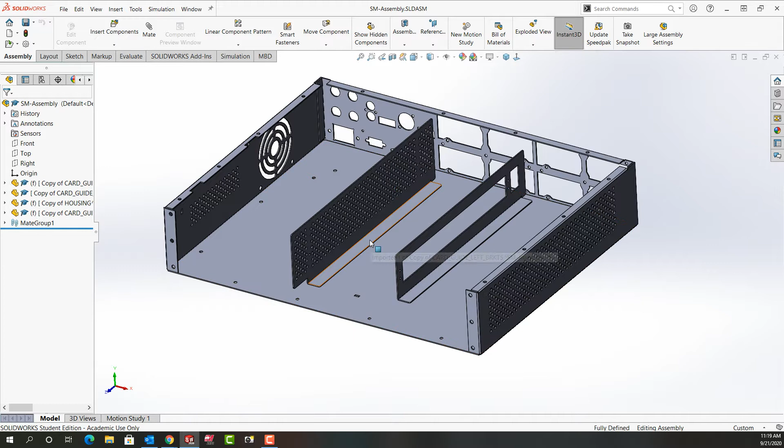In this video, I want to demonstrate how to use the hole series to add a hole so a fastener could be used to fasten this to this. Before I select the hole series, I'm going to pre-select the face where I want the first hole to be. So the clearance hole will be here and the threaded hole will be here.

So I'll pre-select this face and I'm going to look normal to it. By pre-selecting the face, it avoids me starting the hole series and having to create a 3D sketch. Not that it can't be done with a 3D sketch, but if you're not careful, you can accidentally put the hole on an angle. By pre-selecting the face, the hole will start normal to that face.

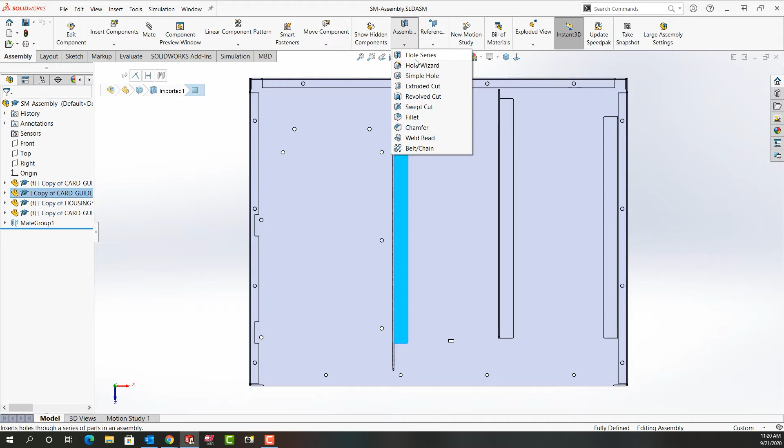So now I've pre-selected and I've looked normal to, I'm going to come up to the assembly features, to the drop-down menu, and I'm going to select hole series. Not hole wizard, but hole series. And the first thing it'll do is it'll say, do you want to create new holes or use existing? I'm going to create new. So I'm going to add 3 points and I'm going to push escape. And I'm going to select them all. And I'll make the relationship vertical.

I'll use mouse gestures to activate smart dimension, and I'll dimension from this edge of this part over. Don't worry that my dimension is not where it should be. With my cheaper graphics card, this often happens. That's okay. I'm going to click to place the dimension. I'll put my size of 0.325 and enter, and it'll go to where it should be. This might happen several times.

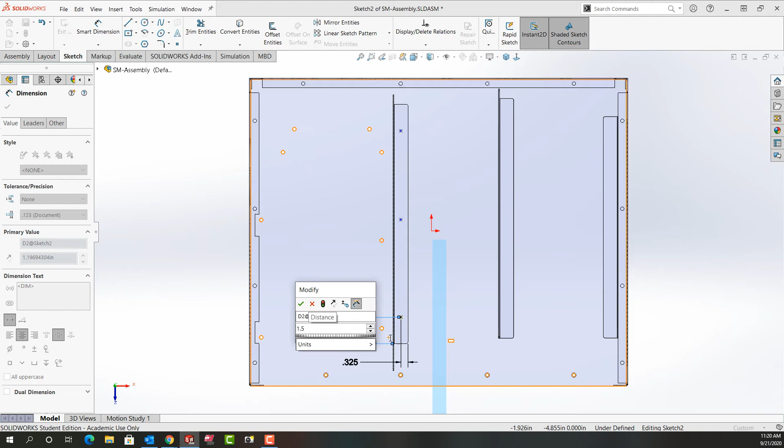So now I'm going to dimension from here up. Again, not worried about where the dimension is. I'm going to make that 1.5. And then I'm going to do the center to center for the remaining 2 holes at 4. And you can see now it's dimensioning in the correct place. So I have my sketch fully defined. I'm going to tell it I'm done dimensioning. I'm going to rotate around a bit so we can see it better. And you'll notice there is a preview already of the hole.

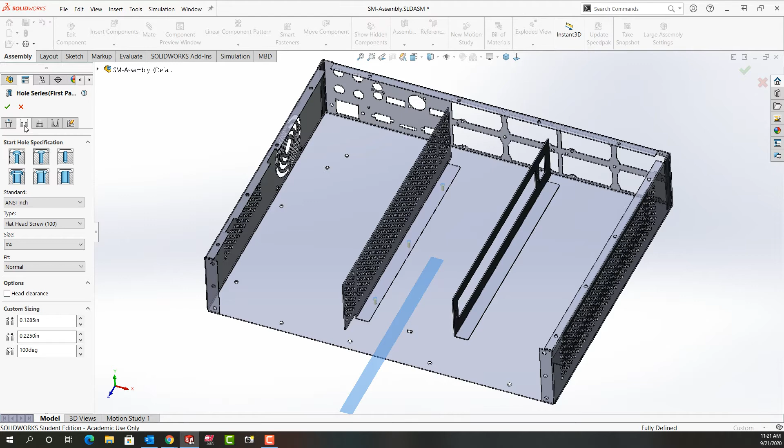So the first thing to do in the hole series is to fully define your positions. And then I'll go to this tab. And what it's asking me here is, in this first part, what type of hole do I want? So I'm going to tell it I want a countersunk hole. And if I zoom in, we can see the preview of a countersunk hole. You can see I'm working with the inch standard. I want a 100-degree included angle flathead screw, number 4, and I'll leave all the standard sizes.

Then I go to the next tab. This tab is if there's more than 2 components. What do I want the hole between the first and the last component to be? I can do a clearance hole or I can do a slot. Now we only have 2 components, so I don't have to worry about that. Then I'm going to select this, and this says for the final part, what's your hole type? I can have a clearance hole, a clearance slot, or a threaded hole.

So I'm going to do a threaded hole and tell it to auto size based on the start of the hole. The bottom tapped hole is great, or I can switch it to just a tapped hole. And the size, I don't want a 4-48. I'm going to come back here and say I want the 4-40. And the tap drill, I'm just going to tell it to go through all. And the thread, it might have a problem with the 2 times diameter because the part isn't that thick. So we'll see what happens.

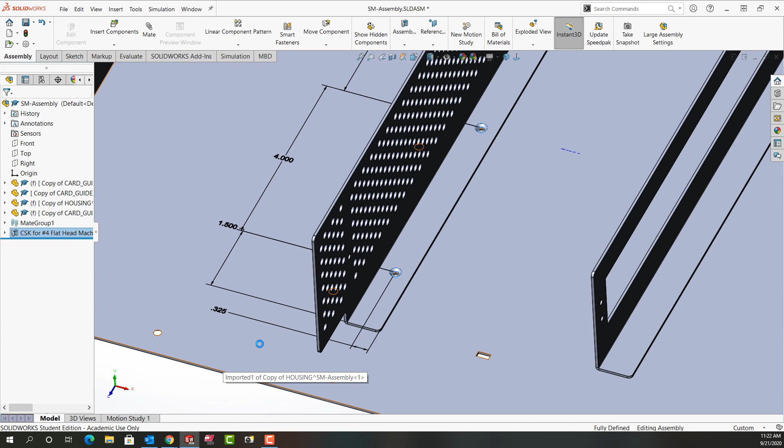I'm going to tell it I want to select the end component now. When I click this, it may give me a warning it's not allowed. It probably has selected it. So I'm going to right click at this point and accept it. And we'll see what happens. Okay, so I want to see what's happened. Here is my hole. Just going to right click on annotation to shut the dimensions off.

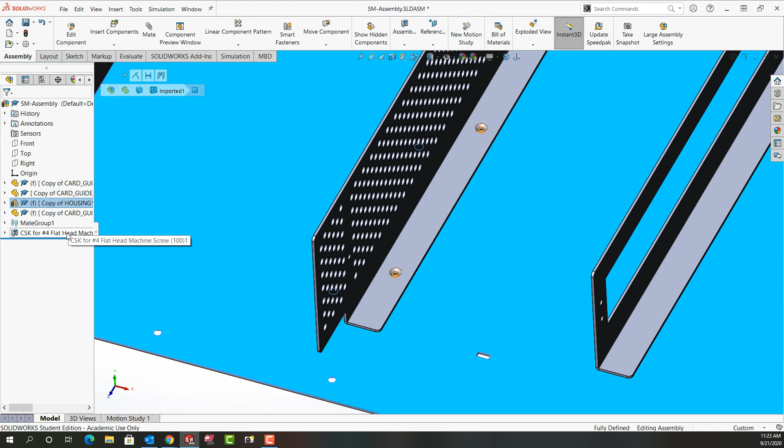So I want to look inside this part. So I'll expand it. And here we see the countersunk clearance hole. I'll minimize it. And then I want to look inside this part. I'll expand it. And here we do see we did get the 4-40 tapped hole. It has the position sketch. It was just having a hard time because the depth isn't 2 times diameter. So it's all good. At any point, if I want, I can go back and I can edit this hole series like any feature. I can come here and say edit feature. And I can change anything I would like.

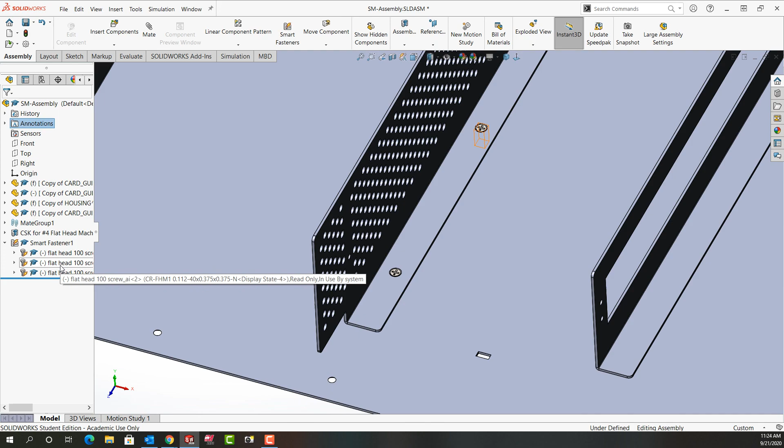So the last thing I could do is tell it to place a fastener out of the library. It's called Smart Fastener. Again, it's turned on all the annotations. So I'm going to right click and shut them off. And now it's got a folder here for the Smart Fastener. So it's added 3 flathead screws. But as you can see, they extend quite a ways beyond the part. So at this point, I'm going to save my work.